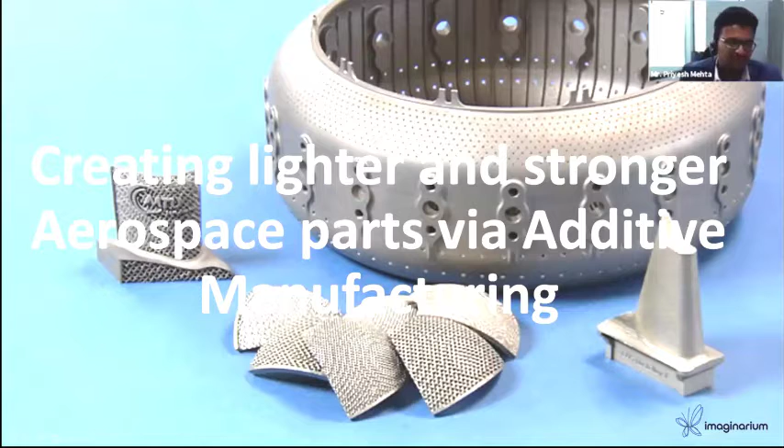As the gentleman said, digitalization and Industry 4.0 is the next big thing in aerospace manufacturing. And the gentleman before me touched upon regulatory standards. So we're going to talk a little bit about how we are already creating lighter and stronger aerospace parts with the power of additive manufacturing.

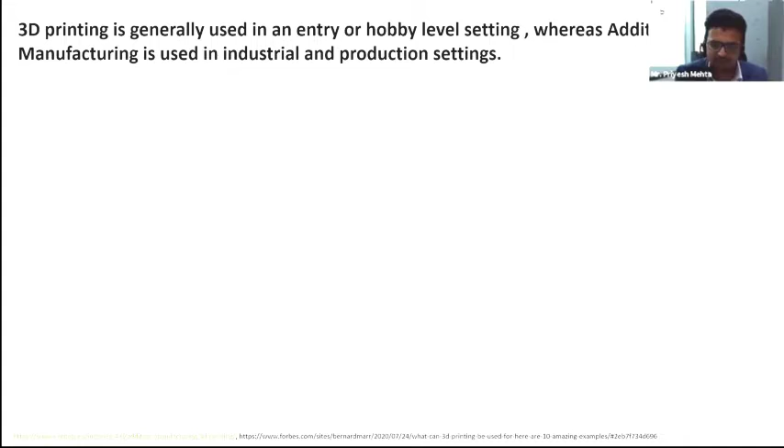A quick introduction about Imaginarium. We are basically a 3D printing company. We have been in the business for more than 15 years, and we are serving the aerospace, defense, automotive, appliance, medical devices, jewelry, and industrial design industries for that many years.

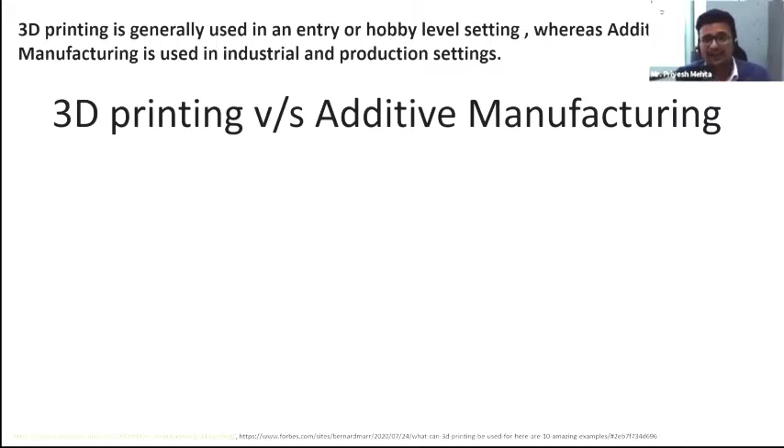Let's talk a little bit about the difference between 3D printing and additive manufacturing. So 3D printing is generally used in an entry or hobby level setting, whereas additive manufacturing is used in more serious environments, industrial and production settings. Just wanted to set some context here.

OEMs and tier 1, tier 2 suppliers are already using additive manufacturing for production. I saw a lot of questions about, hey, can we use additive manufacturing for production as well? Yes, of course, if you find the right business case. If you redesign your components for this technology, then it's definitely possible. I'll also be sharing some case studies which will talk about this.

For example, GE Aviation has 23,500 plus flight quality parts produced till date. The first FAA certification was done in 2015. After that, multiple parts were certified. Right now, till 2019, the data we have shows there are 25 parts in active certification projects.

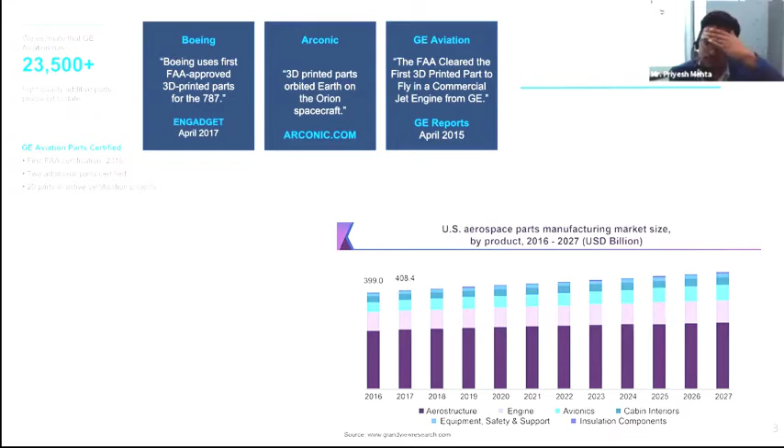Similarly, Boeing, Arconic, all of them jumped on the bandwagon to harness the design freedom and on-demand manufacturing capability offered by additive manufacturing. On your right, you can see a nice bar graph showing where the US aerospace market is using additive manufacturing. Mostly it's structural components, aerostructure, some engine components, some avionics, cabin interiors as well.

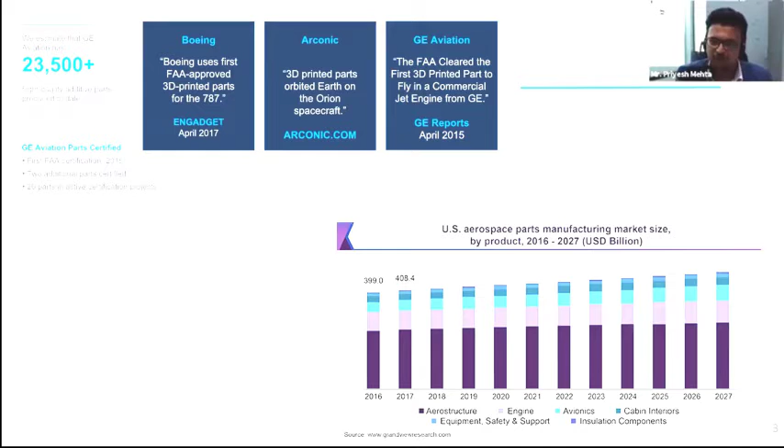I'll be showing you a short video where a European OEM is using this for structural cabin interiors, equipment safety and support, and also insulation components.

What has Imaginarium done? As the gentleman before highlighted, regulation is key. So we've been helping the Indian Air Force design, develop, and manufacture spare parts for various aircrafts and helicopters. The most difficult step for us was to get our parts certified. So we're very happy to say that close to around 18 parts manufactured by us in metal 3D printing have been certified by RCMA and CEMILAC.

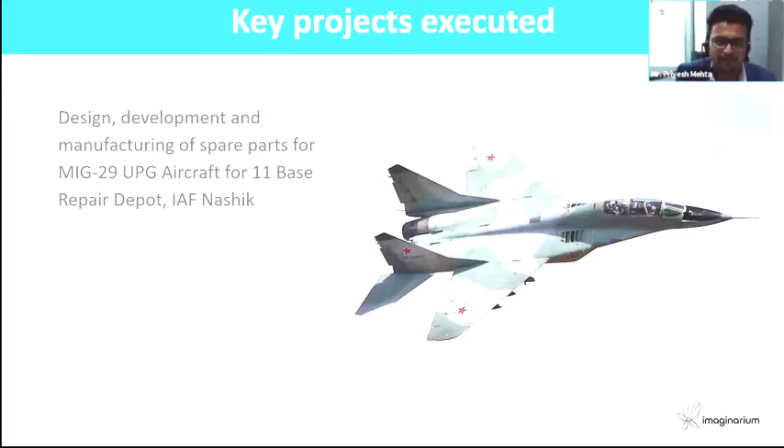We recently got that news, so very excited to see how that goes. We've done a lot of work with the 11 Base Repair Depot in Indian Air Force Nashik base for the MiG-29 UPG aircraft. We've also done some work with 4 Base Repair Depot in Kanpur, where they gave us a part which was originally manufactured in Russian Ka-14, Ka-16 material.

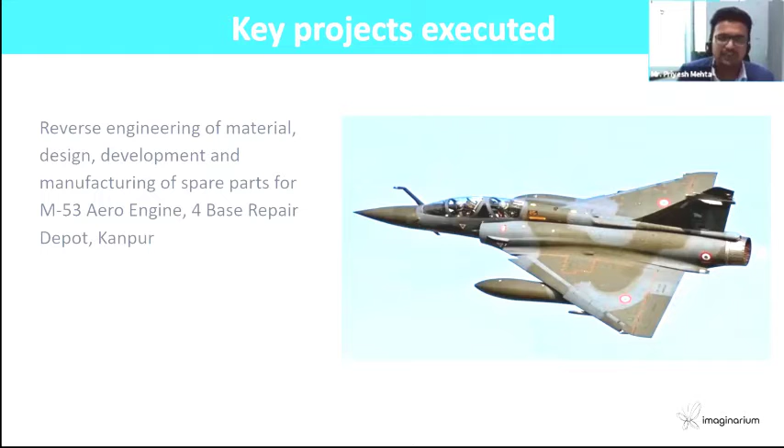We reverse engineered the material, did some spectroscopy analysis, found out the equivalent, and manufactured those spare parts for them using additive manufacturing. We've done a similar activity with 3 BRD in Chandigarh for Mi-17 helicopters as well. These are some of the parts which we are allowed to show.

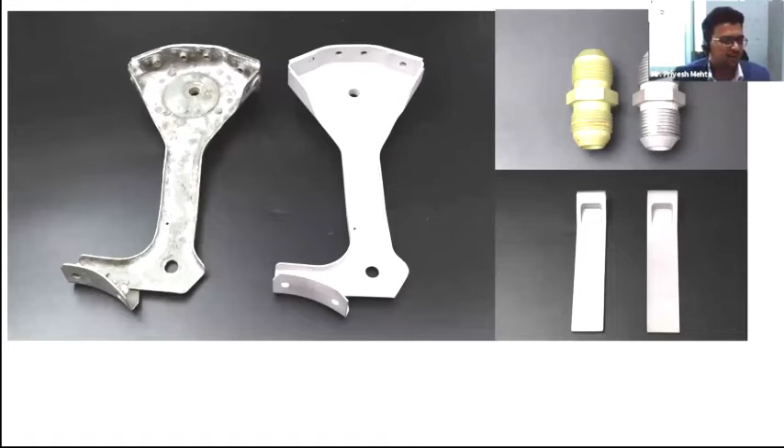The image you see here on the left is the door handle for the MiG-29 aircraft. On the left side you see the legacy part, while on the right side you see the 3D printed part. So what we did is we reverse engineered that part using our 3D scanner, created a CAD file, and printed it in AlSi10Mg alloy.

What are some potential applications in aerospace where additive can be very handy? The first one is obviously aircraft parts and systems, interior parts, and secondary structures as well. A lot of companies in Israel and that region are using additive manufacturing for avionics. Also engine components - GE, Safran, Boeing, and even Pratt & Whitney have been using additive manufacturing to produce engine components in Inconel and super alloys.

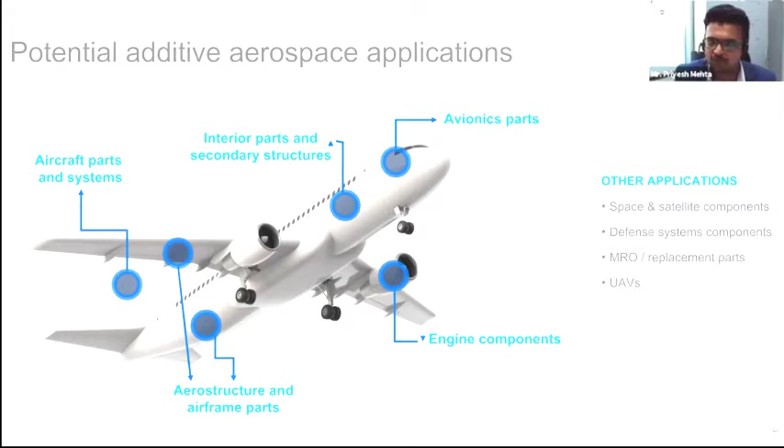This whole journey of the aerospace industry getting into the additive bandwagon started a couple of years back when GE identified a business case for a LEAP fuel nozzle, where 20 parts were consolidated into one part. There was an inventory reduction of 95%, weight reduction of 25%.

I'm sure all of you here will agree how important it is to reduce weight for aerospace parts to optimize the buy-to-fly ratio. Also, the cost improved by 30%, and the resultant nozzle was 5 times more durable than the previous one.

I come from a welding inspection background, and I can tell you that inspecting these welds, if manufactured using welding or other fabrication conventional techniques, would have been a nightmare for me. I would have scratched my head over and over - how do I take ultrasonic shots or radiography shots on this?

Somebody in the audience had also asked me whether additive manufacturing is used for mass production. So if you see here, GE is already using this for full scale production - 35 to 40,000 components per year.

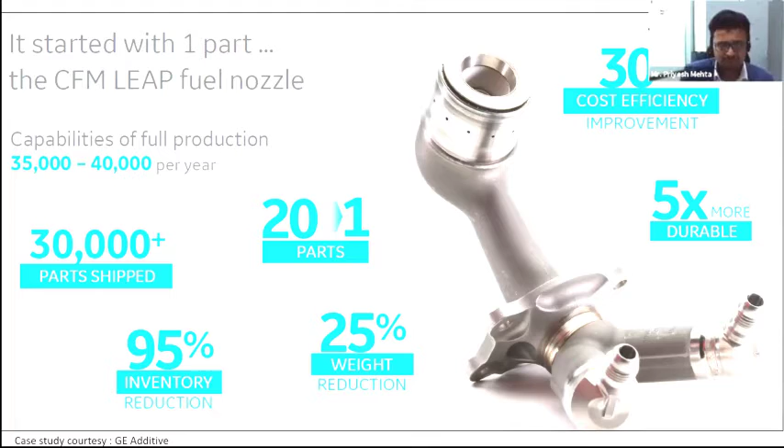One more example was for the catalyst engine. They were planning to test a combustor, and they used the power of additive to consolidate 855 parts into 12 parts, which resulted in 5% weight reduction and 20% lower mission fuel burn. So the combustor test schedule was reduced from 12 months to...

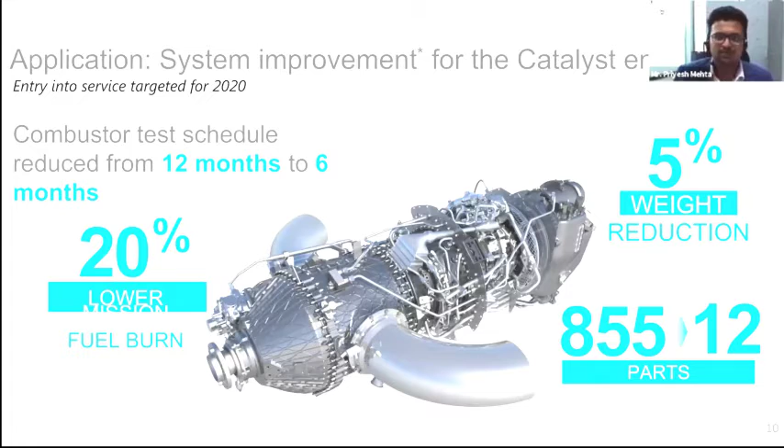Additive manufacturing consists of a set of 7 different processes where an energy source or binder is used to join or fuse powder particles together.

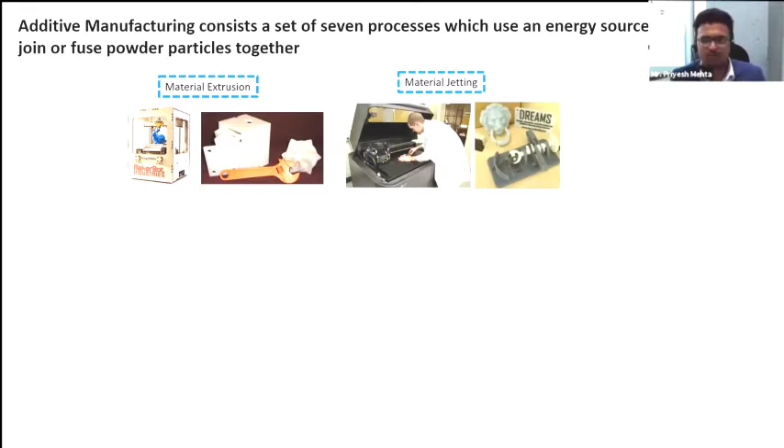The first one is material extrusion, which is used more in an entry and hobby level setting. Second is material jetting, very similar to 2D printing, but instead of paper, we use powder - nylon powder or other materials.

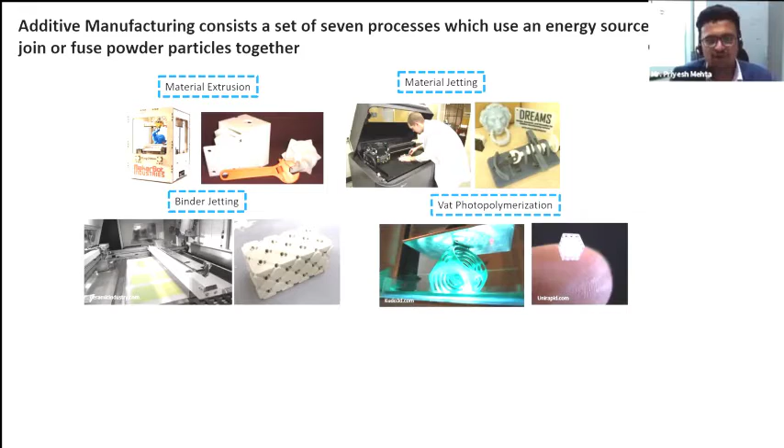You have binder jetting, where a binder is used to fuse two powder particles together, and the process keeps repeating itself layer by layer. You also have vat photopolymerization, where an energy source like a laser or projector beam is used to cure photopolymer to create a solid layer, and it repeats itself.

Powder bed fusion is the most commercially successful technology available for aerospace applications. We're going to talk about that in a little more detail.

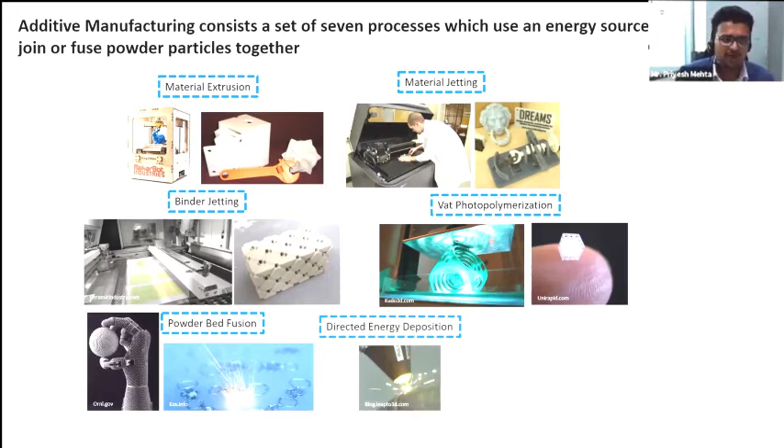Directed energy deposition, where you use a kind of laser or electron beam head to deposit material, very similar to welding. And also sheet lamination, where it's pretty much like laminating paper or metal sheets together.

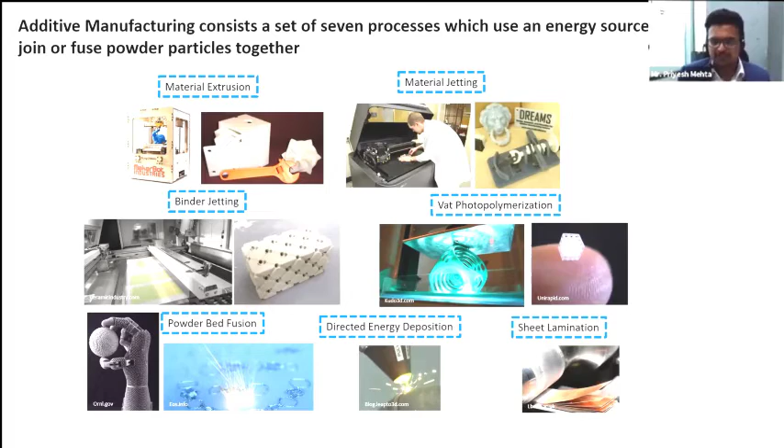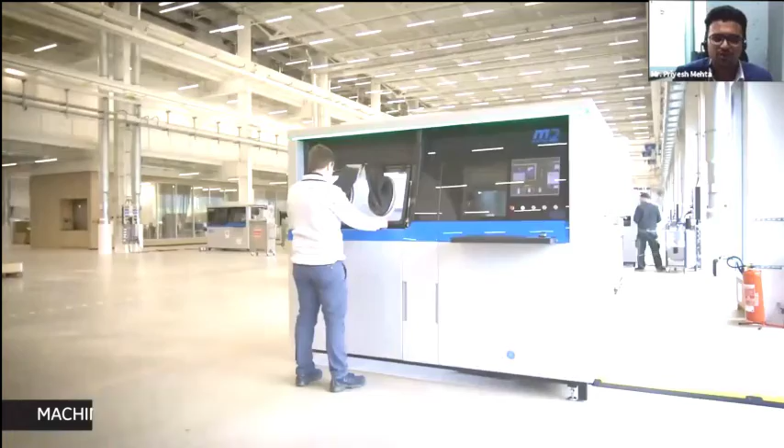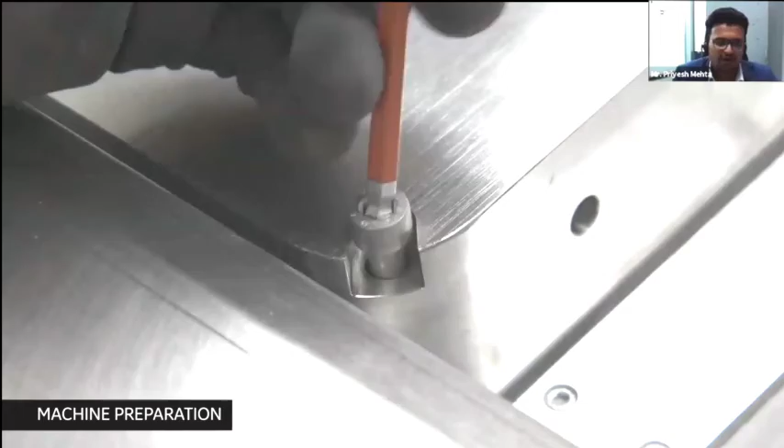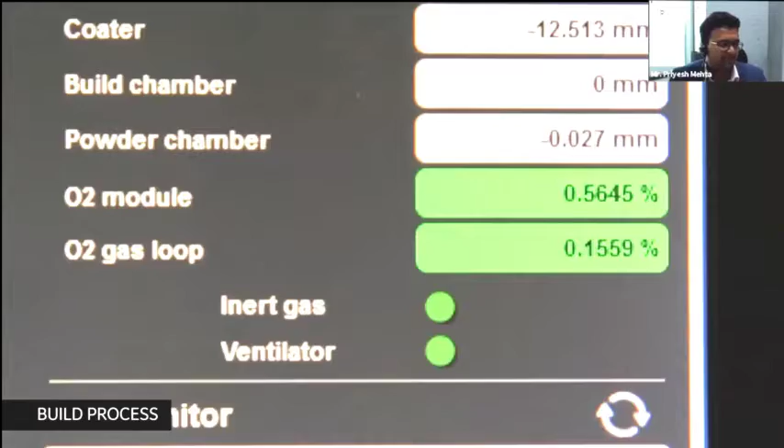The build plate is bolted to the machine. You create a CAD file and slice it into 2D cross sections. A fiber laser is used to draw that cross section on the powder bed, and this process repeats layer after layer until the final shape is formed.

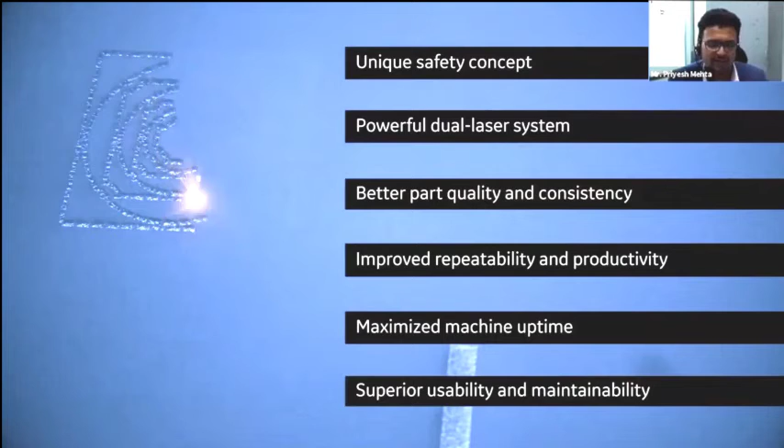GE has been using this technology for production, and they have more than 100 machines in the US. This is how the part comes out - there's a powder cake, you have to excavate the part from the cake, and you get the resultant part.

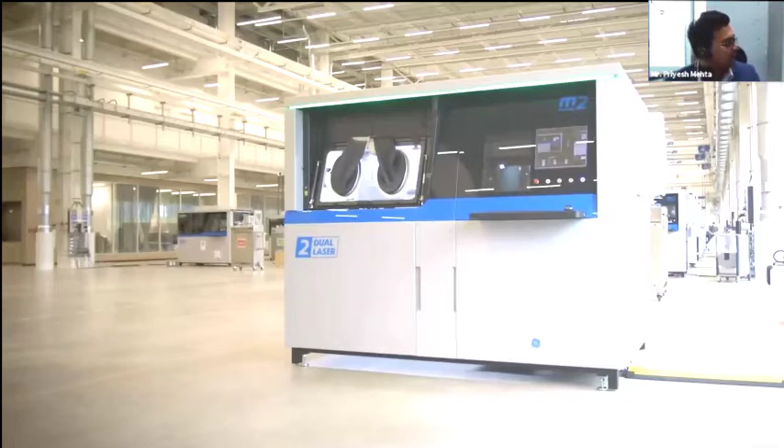As you were talking about Industry 4.0, I've worked on both sides of the game, designing and manufacturing. We know there is always this invisible wall between the designer and manufacturer. What happens is the designer generates a design, throws it back to the manufacturer. The manufacturer says, 'hey boss, the thickness is very low, you have to increase the thickness and give it back to me.' This happens again and again, right?

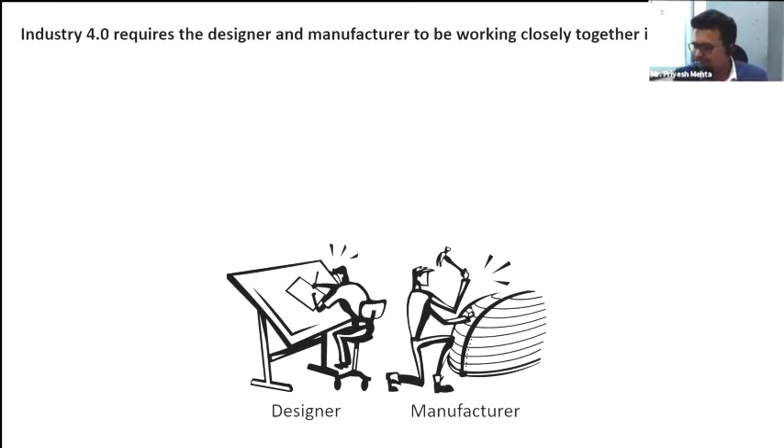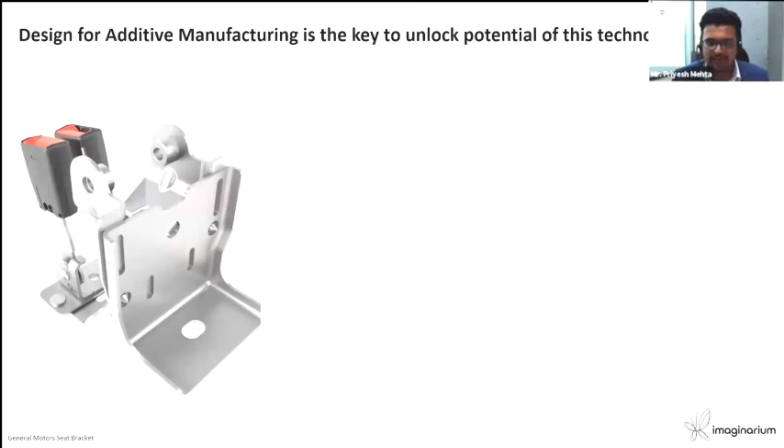Additive manufacturing can reduce or bridge that gap between the designer and manufacturer. Let's see how that's possible. For example, this is a bracket - a case from General Motors in automotive, where the bracket was manufactured using conventional methods, stamping and welding. The original assembly is 8 components, and the new part, designed for this technology, is 40% lighter, 20% stronger.

It looks cool as well - for me as a designer, it's very important that the parts should look good too. So 8 components were consolidated into one component, 40% lighter, 20% stronger, possible because of additive manufacturing.

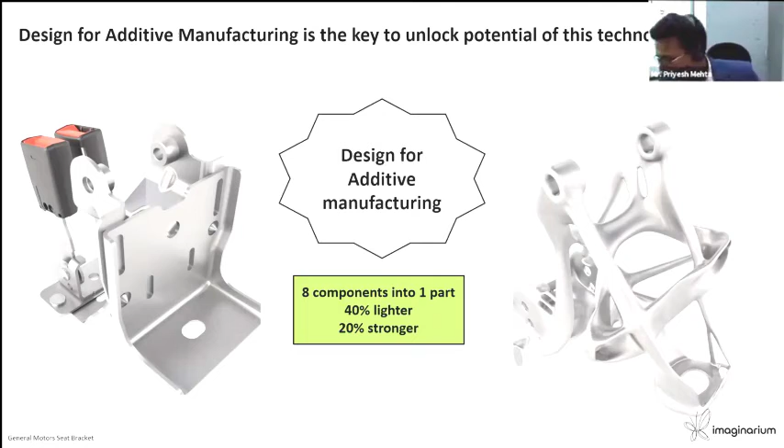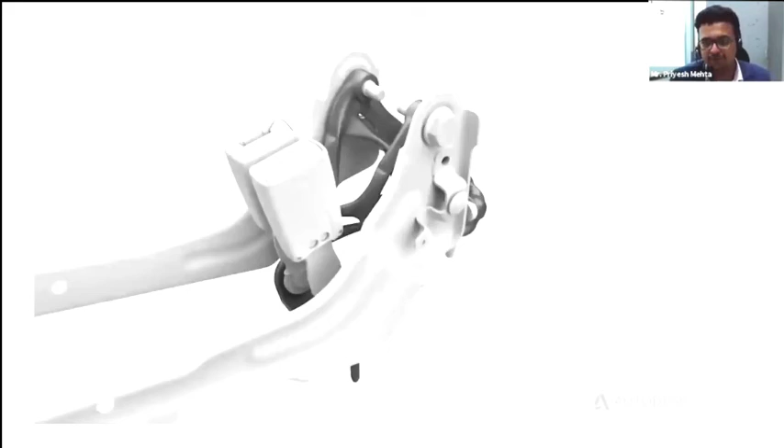I'll also show you the location where the seat bracket was, so you might understand that additive is not only for fun prototyping or low volume, but it can definitely be used for large scale production if you identify the business case correctly. This is a newly designed part used as a structural part in a performance car.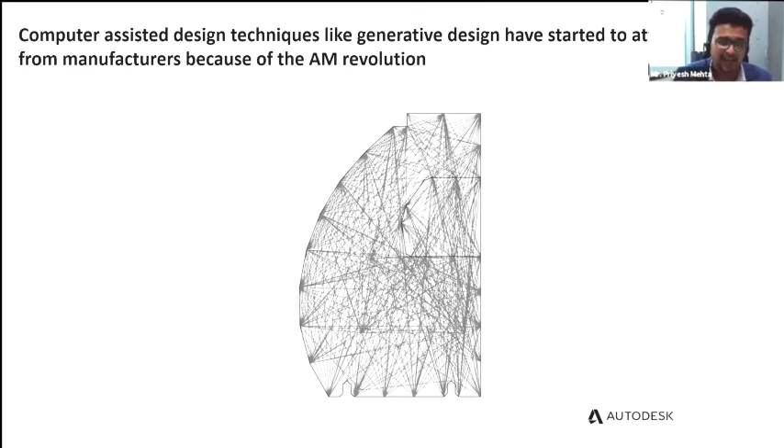There is a method called generative design, where you just define your design space and loading conditions, and the computer algorithm will automatically generate designs for you. This design was generated using that technique.

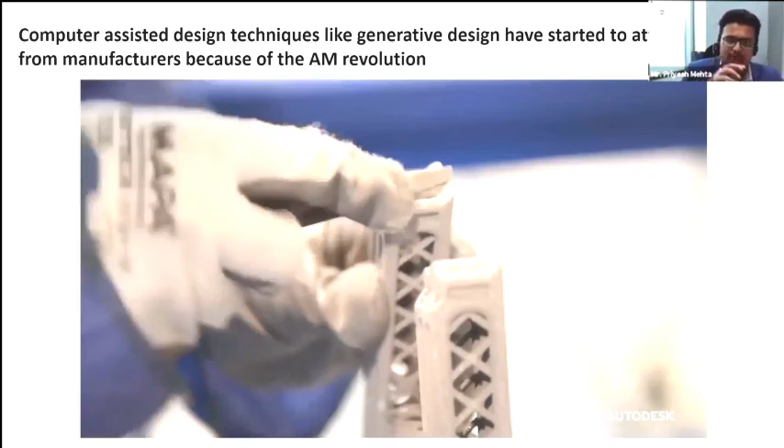This is the wall between the cabin - the fixed points were given, the FE analysis was done, and it was actually installed in an aircraft. The goal was to reduce the weight.

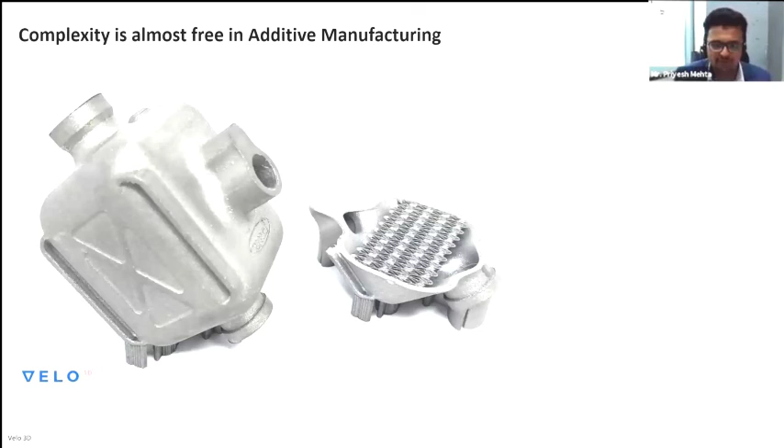Complexity is almost free in additive manufacturing. In machining and conventional manufacturing techniques, to print parts or structures like these, you would have to pay for additional process time. But in additive manufacturing, it's pretty convenient for us to print these lattice structures over and over again.

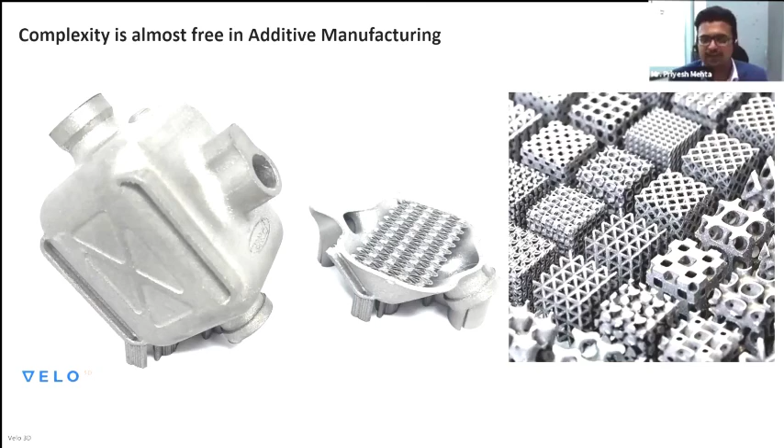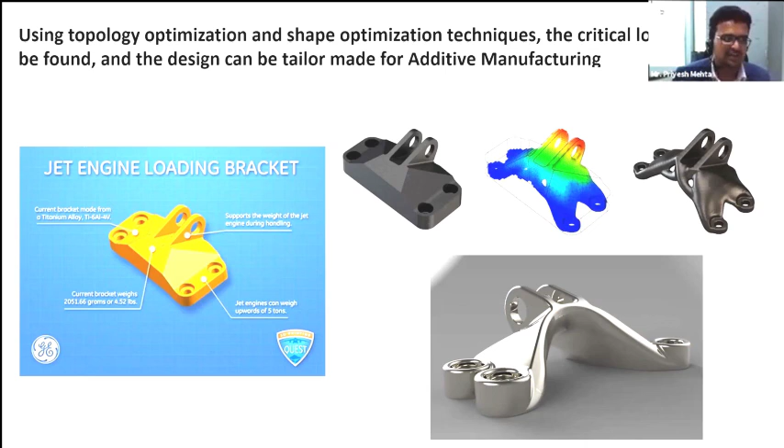The materials which have good weldable characteristics are good candidates for additive manufacturing. We can print in titanium, stainless steel, maraging steel, cobalt chrome, aluminum alloy, and nickel superalloy.